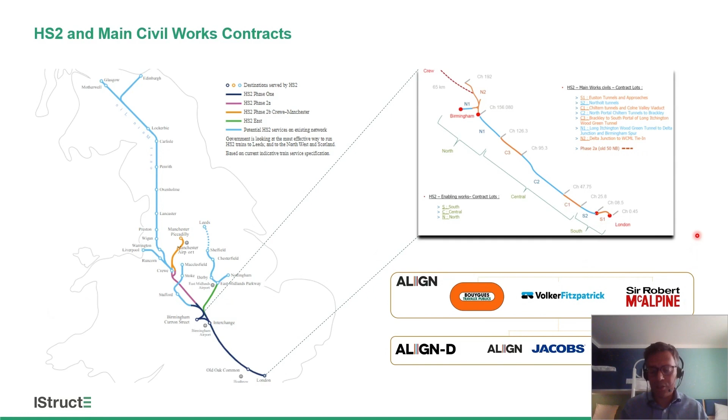A few words about contract C1. It's a total length of 22 kilometers. We've got a 16 kilometer twin bore tunnel with 5 shafts and 43 cross passages - I'm pointing on the shafts with my mouse at the moment, 1, 2, 3, 4, 5. We've got a north portal at the north and the south portal as an entry and exit point for the train. We've got the Western Valley slopes, which is a big embankment and a cutting.

And finally, the 3.4 kilometers of the Colne Valley Viaduct that we're going to cover today.

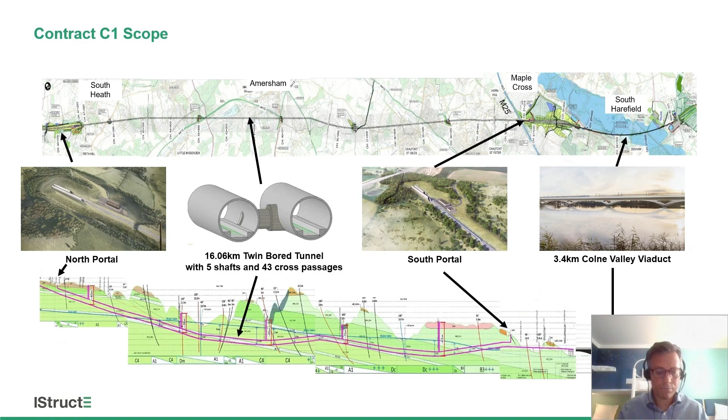A few words about the site overview in terms of the viaduct. The alignment, the black line that you see in the plan view, is the alignment of the viaduct. What I wanted to show in this slide is all the physical constraints.

The viaduct will go over 4 lakes. We've got 4 rivers, the River Colne here and the Newyears Green Bourne in that location. We've got the Grand Union Canal. We've got 3 roads, the A412 North Orbital Road in that location, Moorhall Road here, and Dews Lane. We're going over various utilities that we had to divert. We've got the Denham Aerodrome in that location, and obviously a flight path there.

We've got areas of special scientific interest, the SSSI areas as we call them, with ancient woodland, which we're not allowed to touch, as well as items that you cannot see in the plan view, such as dissolution features.

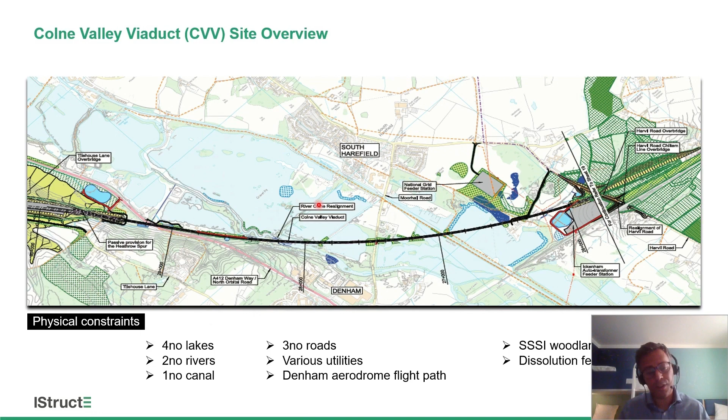A few words about the project requirements. Obviously, we had to design a structure which was buildable, safe, easily maintained and durable. We had to take into account the minimum impact on the Colne Valley Viaduct area. Cost was another factor, aesthetics was another one, as well as consents and our key stakeholders.

Finally, we had 2 particular project specific requirements. One was we had to design a beacon structure for HS2, and the second was that we had to design a structure of international significance. Obviously, this was purely an architectural report, so we had to make sure that we considered these designs and engineered them properly.

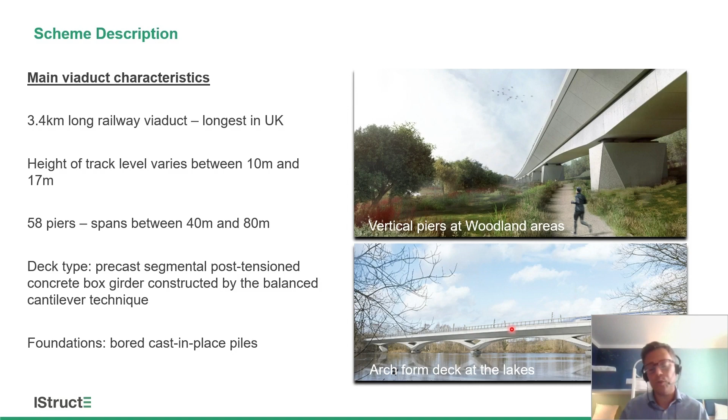A few words about the deck articulation. The Colne Valley Viaduct has been split into 4 modules. Each module is approximately 900 to 950 meters long. Modules 4, 3, and 2 are about that length, with the exception of module 1, which is 465 meters.

The decision for the 900 meter figure was based on the deck expansion and contraction due to thermal effects and time-dependent effects like creep and shrinkage, as well as the maximum stroke of a conventional track work expansion device, a rail expansion device. What we were trying to achieve with splitting up the deck was to limit the rail structure interaction movements as much as possible, and reduce the number of rail expansion joints and gaps, with the intention of enhancing safety and continuity on the rail.

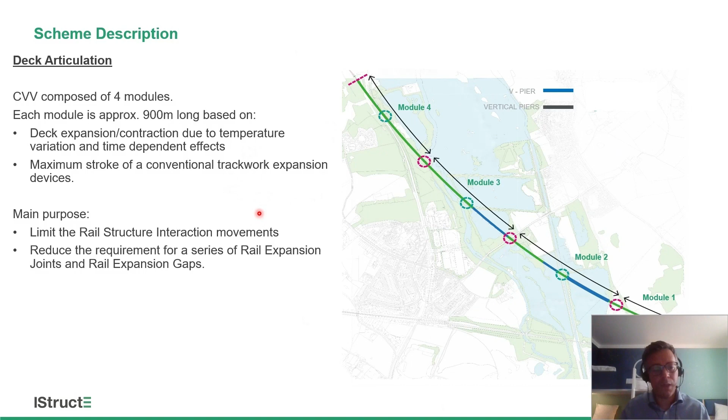Each module has a fixed point at the center, called the fixed buttress. Module 4 has a fixed point there, and the same applies for module 3 and module 2. There's an exception on module 1, where we have a fixed pier located not at the center of the module but very close to the abutment. You can see in this simple schematic how the fixed buttress works compared to the other piers.

What connects two consecutive modules together is an expansion buttress. This is a segregated structure, a portal frame structure, and I'm going to cover this in a bit more detail in the next few slides.

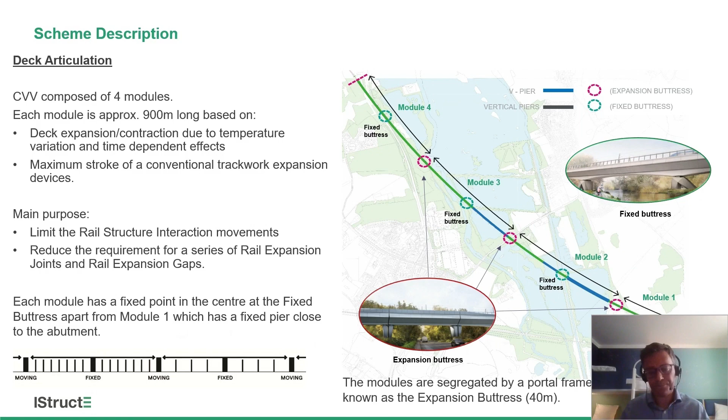We talked about module 1. The main difference of module 1 compared to the others is obviously the fact that it's half the length of modules 4, 3, and 2. It's approximately 465 meters. We wanted to move the fixed pier close to the abutment in order to minimize the expansion length between the fixed pier and the south abutment. This allowed us to remove the rail expansion joint, but when you have a continuous rail and a discontinuity of the structure, you have to confirm there are no excessive stresses in terms of rail structure interaction, so we undertook a rail structure interaction analysis to confirm the stresses at the deck and at the track slab system.

Going into the Colne Valley Viaduct design, I'm going to start bottom up, starting with the piles. For the foundations, we have 292 cast-in-place reinforced concrete piles. In some pile caps we have 4 piles, in others 6 piles. They vary in diameter, sometimes 1.8, ranging from 1.5 to 1.8 meters, supporting conventional reinforced concrete pile caps. They go up to 53 meters in length, and they're typically founded in chalk.

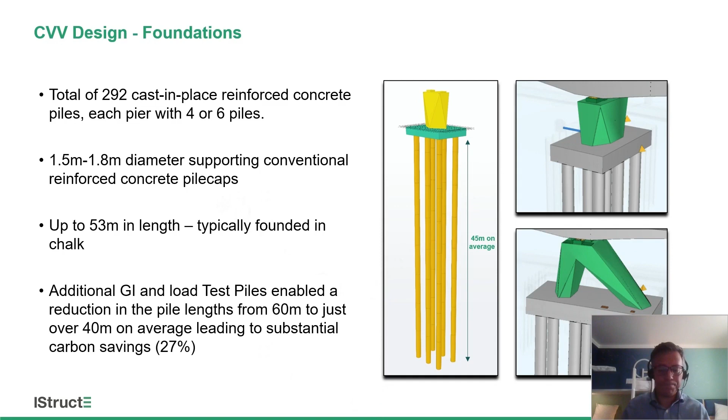A summary of the foundation design as per BS EN 1997 part 1: these are friction piles, and the shaft resistance is based on the effective overburden stress in accordance with CIRIA 574. We ignored end bearing capacity due to uncertainty with dissolution features and voids, and we considered a minimum factor of safety of 1.5, expecting settlements of less than 1% of the pile diameter.

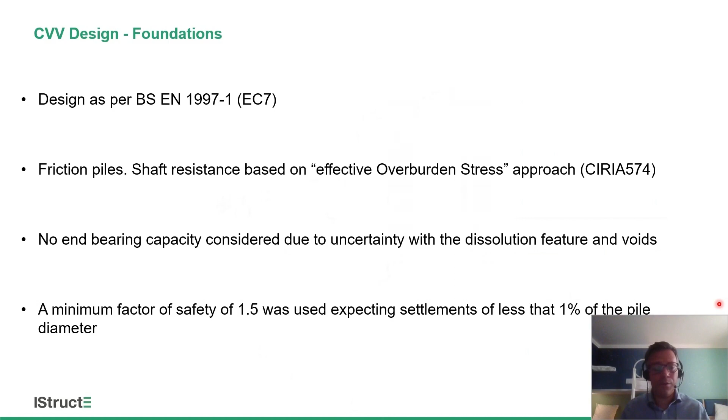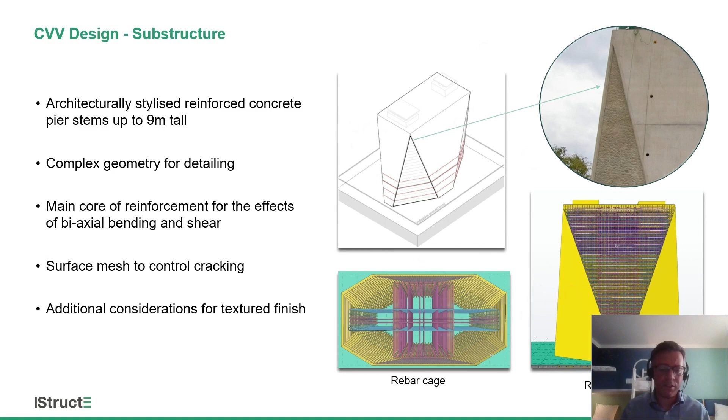One of the fixed buttress piers contains a steel shear key at the top, while the other contains a shock transmission unit. I'll explain why we installed a steel shear key and an STU. We started initially with a monolithic arrangement for the fixed buttress, as shown in this location. This design solution was quite sensitive to soil stiffness, giving excessive foundations and very high stresses due to creep, shrinkage, and thermal effects on the deck.

We had to change to an articulated configuration with the use of spherical bearings and steel shear keys. That way, we managed to reduce the dependency on soil stiffness and optimize the foundations, but we were still getting high stresses at the deck due to creep and thermal effects.

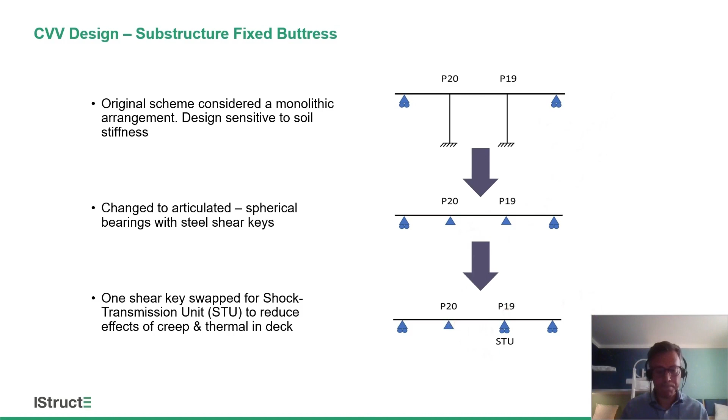I'm going to talk a little bit about the STUs. This is a simplified sketch that shows the 4 modules. The line in green is the fixed buttress pier, and this is the STU that is contained on top of the pier. So the STU is able to transmit short-term impact forces such as braking or traction from the train.

While at the same time it's able to permit long-term movements between the structures such as temperature, creep, and shrinkage. So the principle is similar to the one that we have on our cars, the seat belt, where we're able to move slowly, but during a sudden braking of the car, it locks.

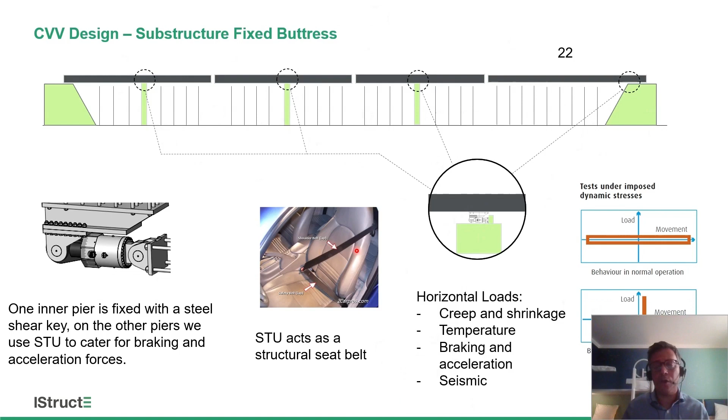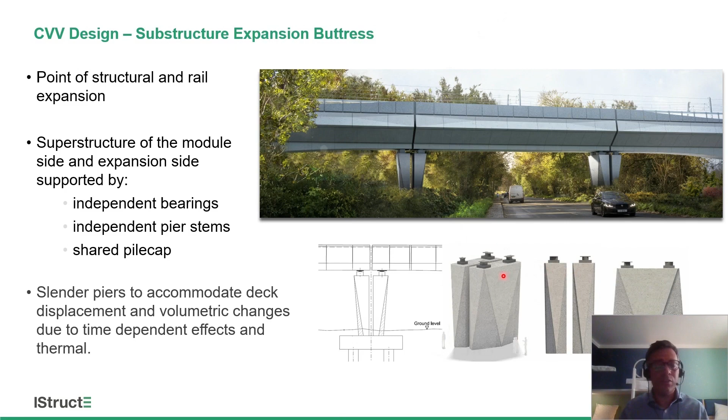Both of these elements, either the end of the module or the expansion side, have independent bearings. As you can see in the isometric here, they have independent pier stems, but they are sharing the same pile cap. Again, these are fairly slender piers because we were trying to accommodate all the deck displacements and the volumetric changes due to the time-dependent effects and thermal movement.

Moving on to the superstructure. This is a single-cell precast segmental concrete box girder. It is able to carry a dual track with trains running at 320 kilometers an hour. It varies in depth, going from 6.7 meters at the piers all the way up to 3 meters at midspan. We have a constant width of 14.7 meters at the top flange and 6.5 meters at the bottom slab.

We've got vertical webs and inclined panels. Something that is worth mentioning is that the inclined panels are not match cast, so they're not really contributing into the longitudinal inertia of the deck.

However, they do contribute in the transverse direction during a particular load case, and that is derailment. So during derailment, when the train derails, it will hit the robust curb. Hence, the whole system—robust curb, top slab, inclined panel—will act as one, and this is when the inclined panel will contribute.

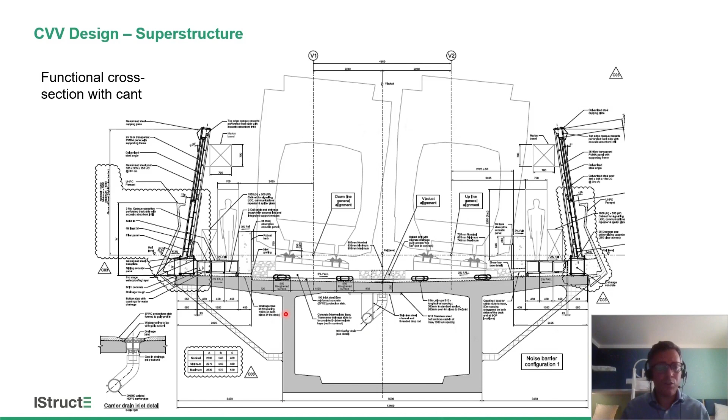I will show you a few joints from the functional cross-section. The main reason why I wanted to share that is to show you what's happening on top of the deck. This is the functional cross-section with cant, and this is the functional cross-section with cant, but at the OCS mast location.

I think it's worth talking about two elements. Well, I will talk about all the elements, but there are a couple of innovative elements here. One is the parapets, which is the element you can see here, I'm pointing with my mouse. This is a UHPFRC parapet, which stands for Ultra High Performance Fiber Reinforced Concrete Parapet. With this type of material, we're able to achieve thicknesses of 50 millimeters in that location, and it's unreinforced. We've got fibers obviously inside, and it's got this strange shape for aesthetic reasons.

We've got the noise barriers in that location, OCS masts, the cable troughs and drainage troughs in that location, robust curb, and another sort of innovative element is the protection slab, which is an SFRC protection slab. It's a steel fiber reinforced concrete slab that is able to work without reinforcement, and any forces picked up by the track slab are transmitted through those shear links onto the protection slab, and then via a shear key that we have very close to the robust curb, we're able to transfer the interface shear onto the deck.

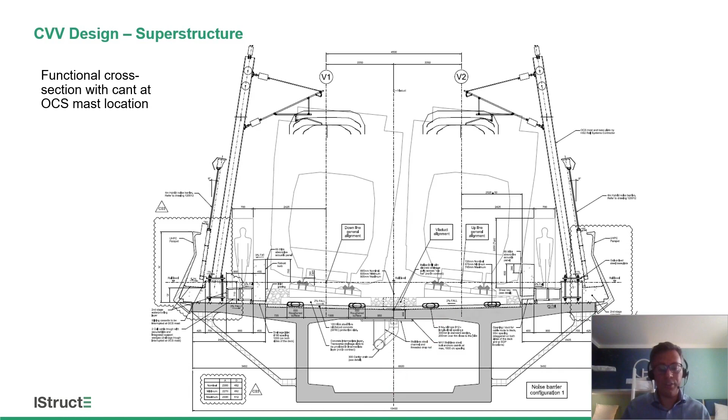Moving on to the arch form deck. These are located over the lakes, as we've discussed before. Spans vary between 67 and 80 meters. They were inspired by the stone skipping effect from the HS2 design report that we mentioned before. The whole idea was to increase the sense of openness over the water and the views.

Those elements are composed of two reinforced concrete legs forming a V shape, connecting to a node in the center at that location, and they're supported by bearings on top of the piers. The bearings are located above the 1 in 100 years flood event plus climate change.

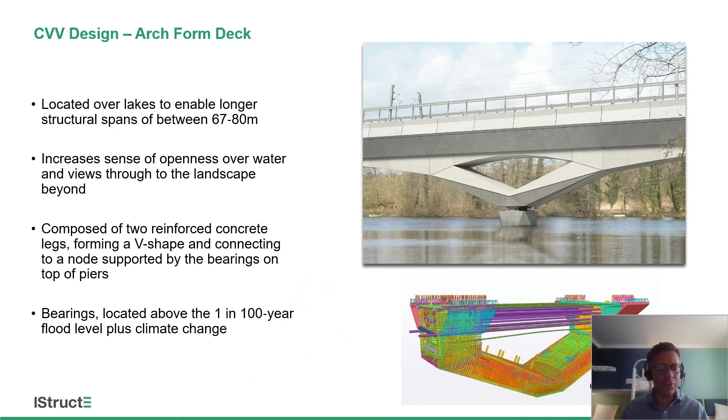One of the things worth mentioning is that although it looks like an arch, there isn't any arching effect in that bridge. We were trying to avoid that. Obviously, we don't have massive foundations to take this lateral thrust from the arch, so we designed those elements to act as deep beams.

The deep beam behavior means the lower chord of those elements acts in compression, and for that reason it doesn't generate any lateral thrust in the foundations. Obviously, those piers move because of volumetric changes due to creep and shrinkage, and when they move, they will predominantly create a particular eccentricity at the location of the bearings at the central node.

What we did in order to avoid that, we inverted the bearings. We actually turned the bearings upside down, so that the sliding element is located at the top of the pier rather than under the deck. With that configuration, the vertical reaction will always be located at the point of intersection of the lower chords of the arch form deck, and this improves substantially the structural behavior of the deck. Obviously, that way we are transmitting the eccentricity onto the pier stems, but we have designed this out.

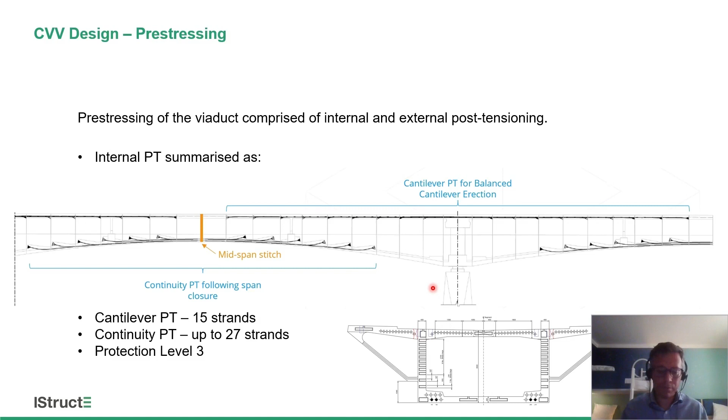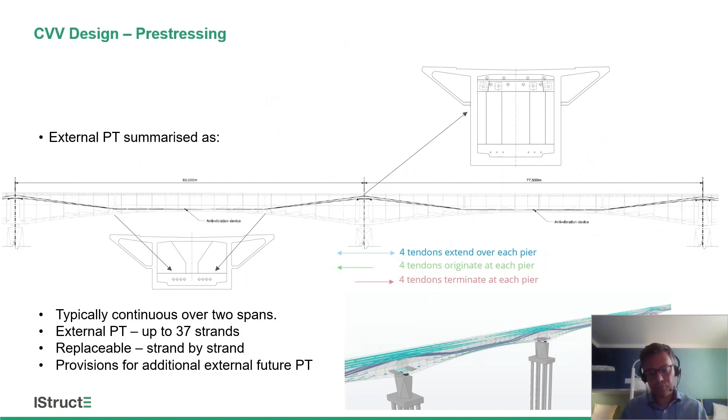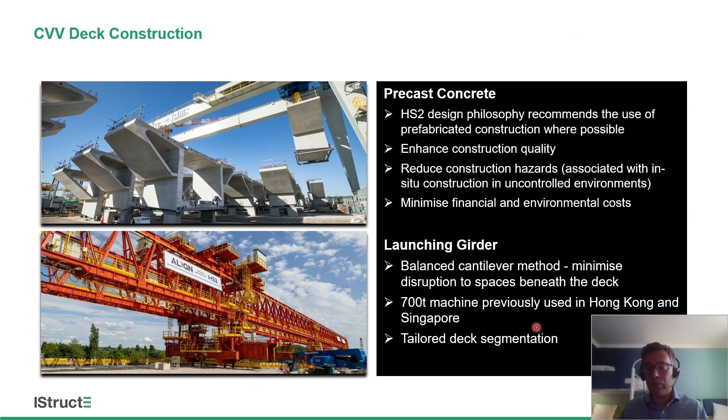The viaduct is constructed with the use of a launching gantry. We used this 700 ton machine. It was kind of recycled - it was used before in Hong Kong and Singapore. We had to dismantle it, ship it out to the UK and erect it again. All the segmentation and the deck segments are tailored to the launching girder.

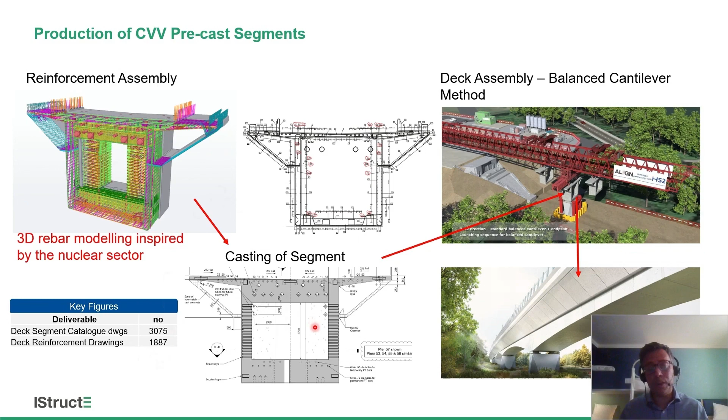We did use a lot of 3D rebar modeling in the design. This was inspired by the nuclear sector. We produced more than 3,000 segment catalog drawings and more than 1,800 deck reinforcement drawings. All the 2D drawings were coming out of the 3D rebar modeling, and they were used on site.

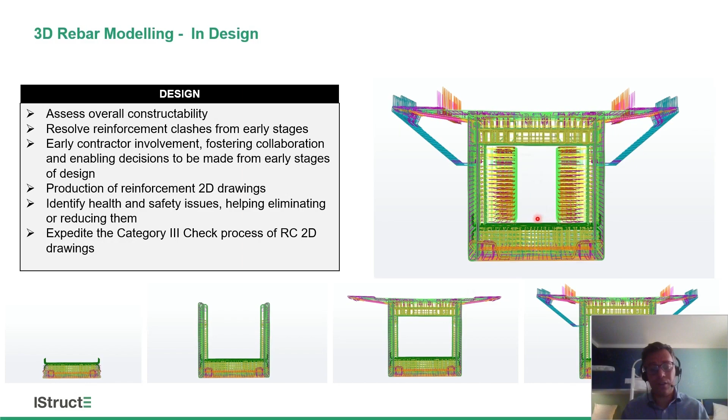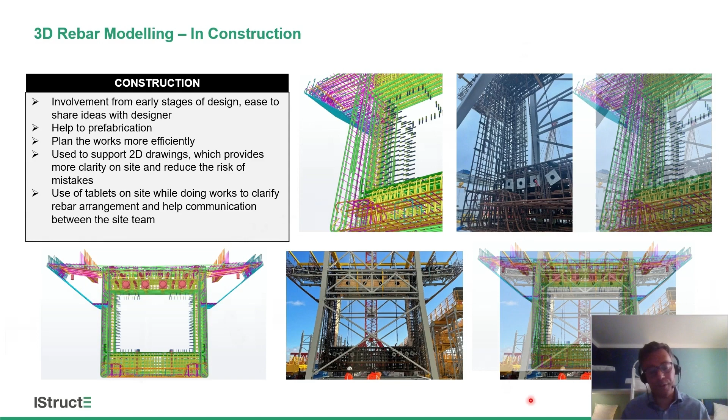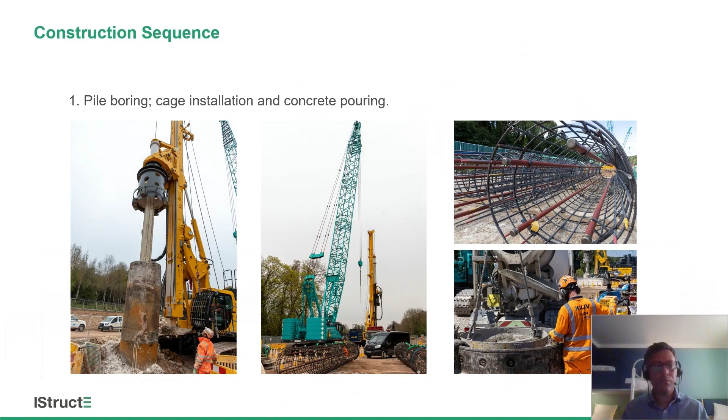Substructure piers - this is the fixed buttress pier. You can see the complexity in terms of the reinforcement in this rebar cage. We've got the shutters, the formwork in the middle, and also the final concrete finish on the right hand side.

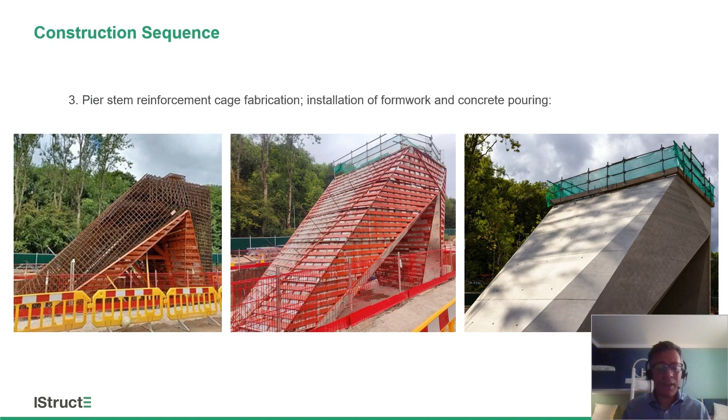I have a few slides to go through a typical cantilever span erection. I'll go through these quickly - I'm conscious of time.

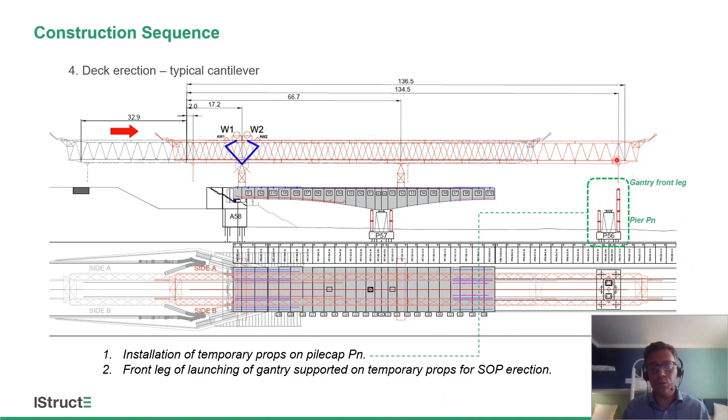We're going to start with the installation of the temporary props on a particular pile cap, as shown here. After that, the front leg of the gantry is moved and it sits on top of those temporary props.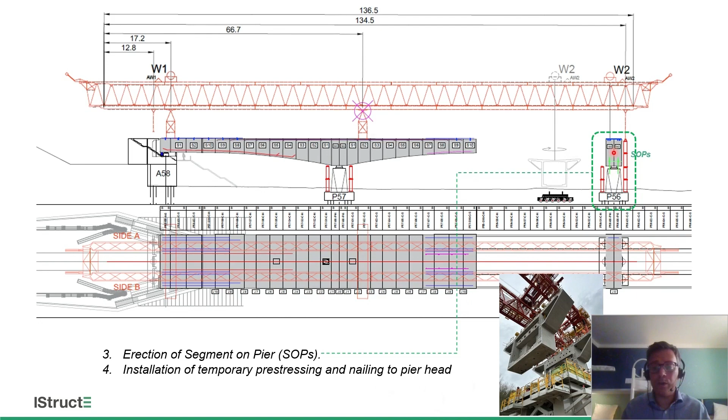Next stage is to erect the segment over piers, or SOPs as we call them. We install the PT nailing system and we connect the SOPs to the piers, fixing them in place.

Next stage is to move the gantry support on top of the SOPs. At that configuration, the gantry is now able to start the balance cantilevering.

We start with the first segments, the so-called S1 segments, as you can see here in the photo in that location, and we install the temporary nailing for cantilever stability during erection, as shown in that location here.

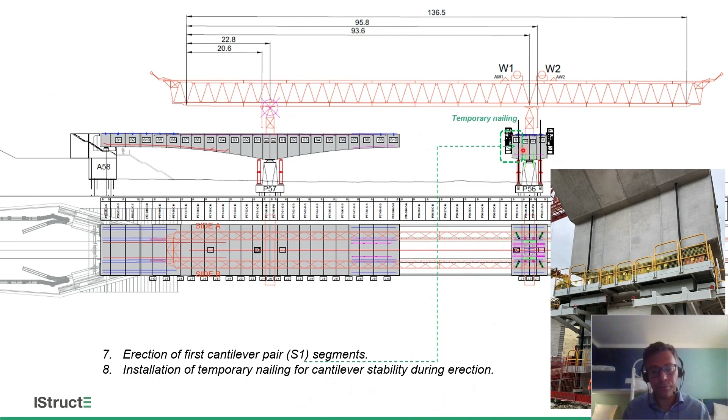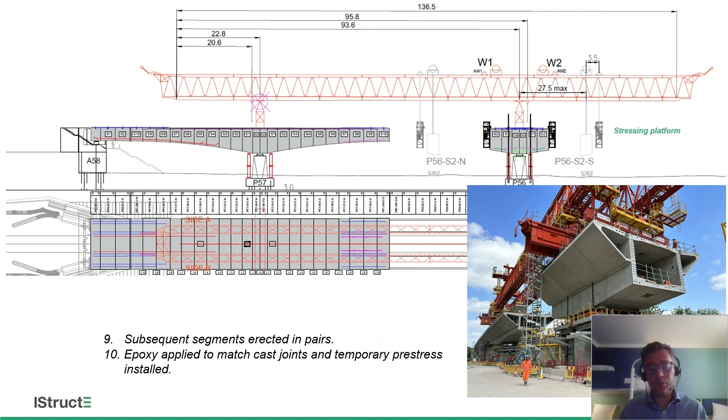After that, all the segment pairs start getting erected. We apply epoxy to the match cast joints, and temporary prestressing is installed to support the segments.

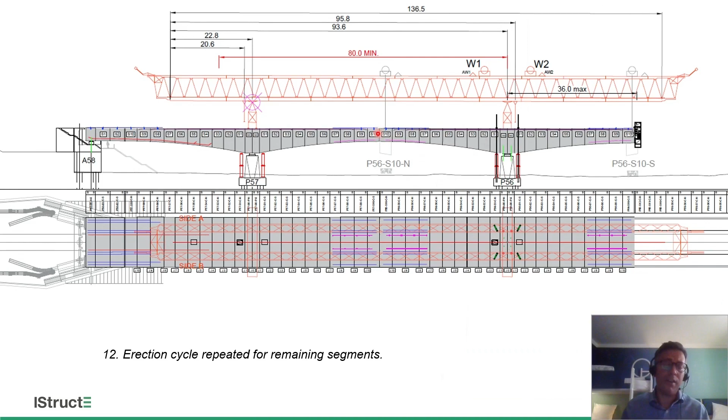We pour the stitch, and the next step is to install and stress the permanent internal continuity tendons at the bottom slab.

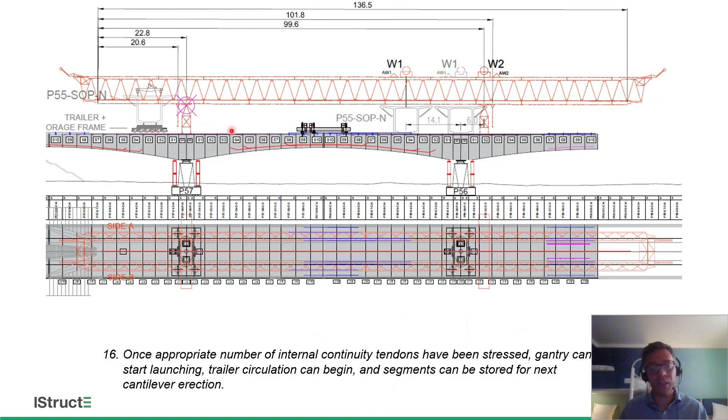Once all the internal continuity tendons are stressed, the gantry is able to start launching again, and from that point onwards we use the trailer, the machine that transports the segments up to a certain point where the gantry lifts it and puts it in place. After that, the whole process continues again.

The gantry is moved on the next pile cap, and it's exactly the same cycle.

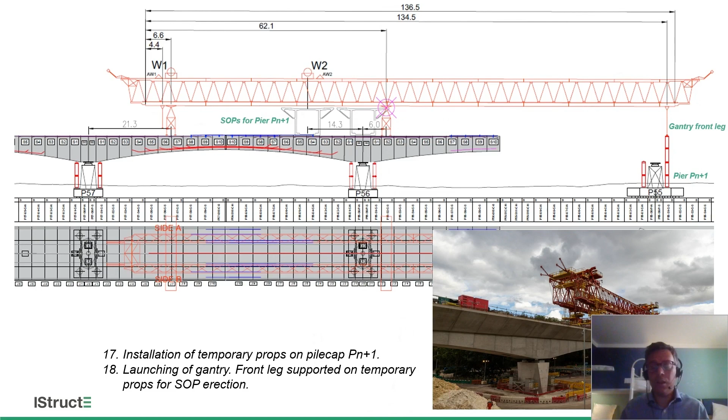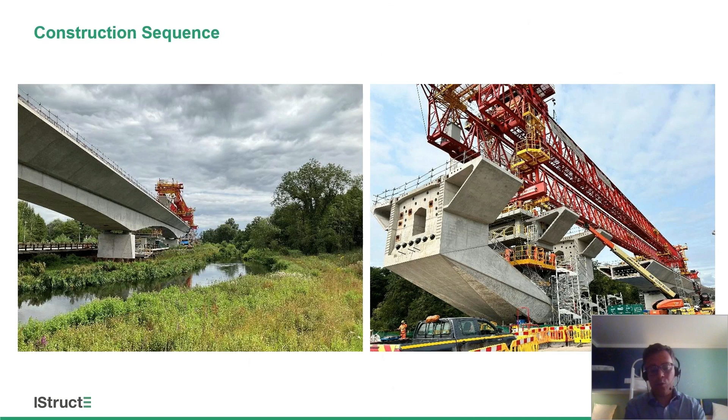Last slide is a few current photos. This shows the viaduct at the woodlands area where we have vertical piers, haunch deck, 60-meter spans, and this shows the gantry sitting at the moment over one of the arch frame decks. Thank you very much.

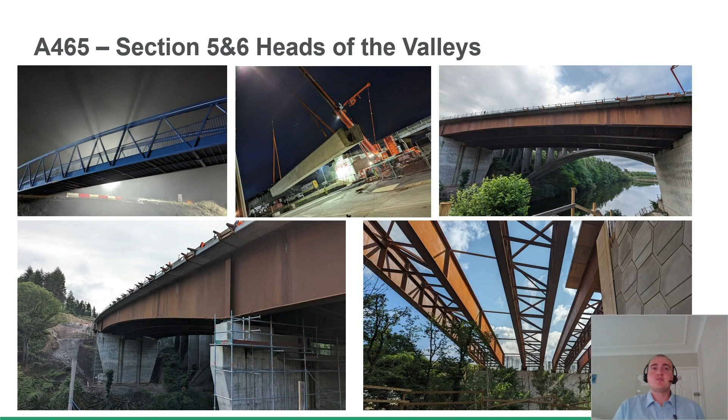Whilst it's only 18 kilometres long, this section of dualling has 36 bridges and 4 refurbished bridges, with a whole variety of different structures going on. We've got a multi-span weathering steel viaduct, a 70-metre integral bridge, some normal pre-stressed beams, some typical footbridges, and then of course a post-tensioned balanced cantilever viaduct.

So who's involved in the scheme and why should you listen to me about it? My name's Henry. As you might have noticed, I don't have a Welsh accent - hate to disappoint you if any of you came for that. I originally grew up in Brighton and then moved to Swansea to study civil engineering. As part of my course, I had a year in industry placement, which was with Atkins in Cardiff.

At the time, they were working on the A465 tender, so I got involved with a load of work on that, carrying out different value engineering tasks. I then went back to Swansea and got my master's, then returned to Atkins, where I dived straight into the design as it was kicking off, and was part of a small team of very talented engineers working on Taf Fechan Viaduct. After 2 years, the design was finished, handed over to the contractor, and I went up to Merthyr Tydfil, where the site office is, to help them on site with the construction.

So you'll be probably wondering all these different logos and who they are. The Welsh Government is the primary client, and FVC, or Future Valleys Construction, is the principal contractor, of which FCC is part of that consortium. Atkins Realis was formerly known as Atkins - we rebranded on Tuesday, so if you're wondering who they are, that's who we are. Tecozam and BBR are the subcontractors on site responsible for building Taf Fechan Viaduct, and Sener was the Cat III checker. So a wide range of companies - I've probably missed a couple, I'm sorry if that involves you.

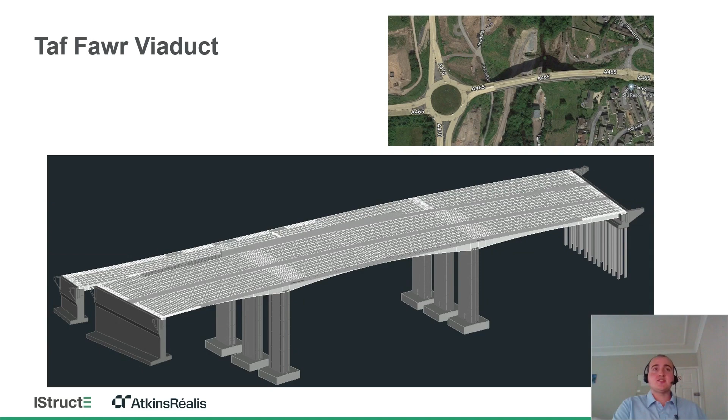Now, a key difference between Taf Fechan Viaduct and the HS2 viaduct we just looked at is that this is a post-tension balanced cantilever cast in situ, so there's no precast segments on this. A key aspect of this design is that we'll build the piers and then get to segment 0, or the hammerhead as we're calling it, and we'll then cast a segment on the east side, cast a segment on the west side, tension the top tendons, and then repeat the same process again.

So our segments in total are 6.4 meters. The closing segments are slightly shorter, and we have 5 segments cast from each pier, excluding segment 0.

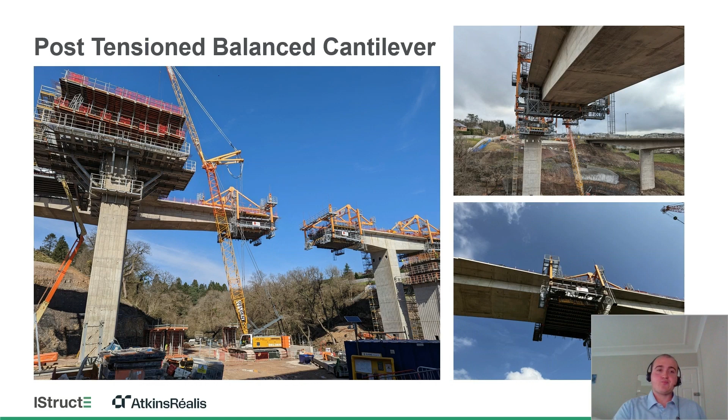So how we've gone about modeling this is we've got a very complicated load model. In this model, we don't just have the 3D geometry, we also have the time aspect, so we have 107 construction stages in this model. It starts off as a line beam, and as you go through the construction stages, it eventually becomes a full-on grillage. And to add even more complexity to this model, we've even modeled the tendons within it.

Now, this had some very key advantages. It allowed us to check the SLS conditions very quickly, so that we could quickly run through, adjust tendon profiles, see what the overall SLS stresses were, and then rework them if they weren't working. It also allows us, because we've got time, to calculate the tendon losses directly in the model to help with the ULS design. And of course, it's also helping with pre-camber. I can just run a button, it spits out all the pre-cambers. I can hand that over to David, and he can go and instruct the team on site to build them as such.

So I'm going to dive into a little bit of the various elements of the structures and hopefully give you an insight into what governed their design. As you can see, our piers are actually quite tall and quite chunky. It's now 35 meters, which might not sound like very much, but when you're walking up those stairs, it sure is tiring.

What governs the design of this is the cantilever balance condition. Because we don't have a bearing at the top, the entire moment is held by the piers. Once we've cast one side and not the other, combined with the loading of the travellers and any wind loading, the moment at the bottom of the piers is very large. As a result, we've had to increase the size of the box, so our box stands at 3 meters in width and 7 meters wide.

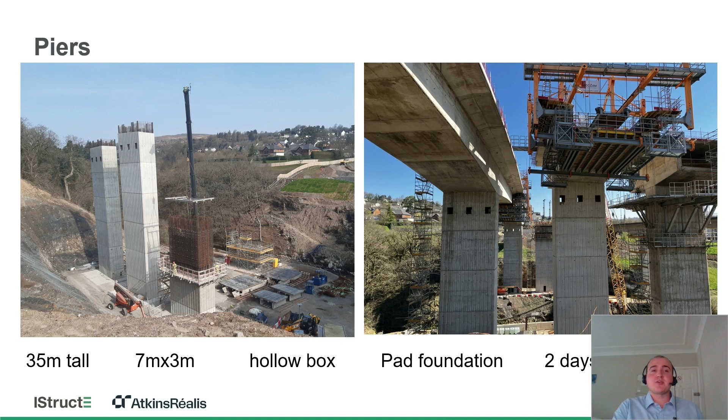Focusing on the abutment design, we have 3 abutments because of the on-slip. The 2 on the west side are pad foundations on rocks with a retaining wall, approximately 10 meters in height - they do differ a little. On the east side, we have a piled abutment, founded on rock. Piles are, I think, 25 meters in length and 1.2 meters in diameter off the top of my head. As you can see in the top corner, we've got a 400 meter cube base being poured, which is for the west main line abutment.

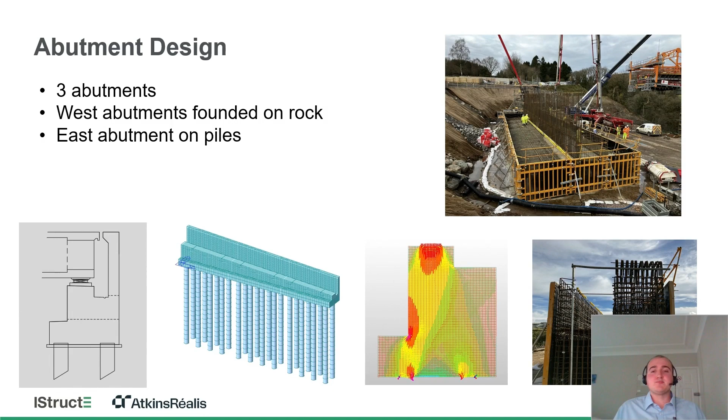Moving on to the deck segments, effectively what we have is 3 separate bridges that end up being stitched together. So we have 72 segments, again 6.4 meters long, where we've got tensioning in the top slab, top of the webs, and the bottom slab. This box ends up being 4.5 meters deep at the piers, and it goes to 2.5 meters towards the center span. The webs are also changing in size.

Over the pier, the webs stay at 700 mil, and that's to allow tendons to anchor in there. Meanwhile, in the center of the span, we drop to 500 mil because we just don't need that sort of thickness.

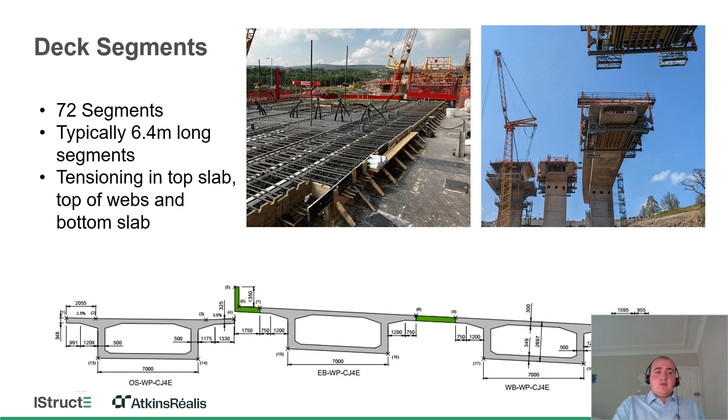Moving on to the post tensioning, which is really where the bridge gets its strength from - we have tendons in the top slab and bottom slab. The top tendons are tensioned as we go along, so we'll cast the balanced segments, tension them up, move out, and then repeat the same again. Meanwhile, the bottom tendons we can't do that because evidently we're not connected up. So these top tendons help in the hogging case, and the bottom tendons in the sagging case.

The way we've done this is we have 19 strands of high strength steel, which get pulled by a hydraulic ram at the different anchor points. Because we have 3 decks, all with different curvatures and different widths, it ends up as 3 pretty much unique tensioning designs, where we've tried to standardize where we can.

So the post-tensioning in the top slab has to work a little differently. Because of the tendons and the high force concentrations from where these are being stressed, we need a lot of bursting reinforcement around the anchors.

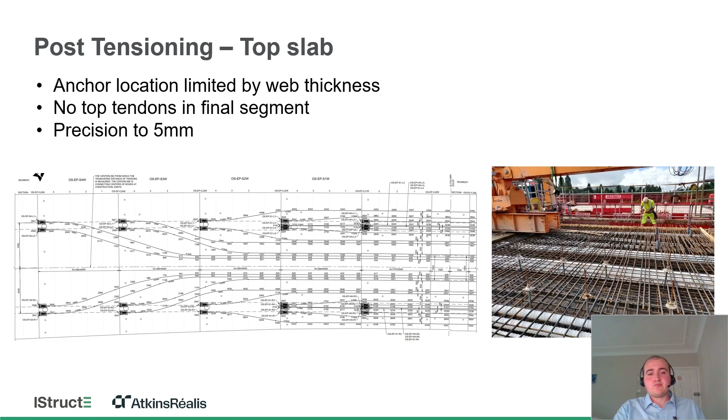So focusing a little more on the post-tensioning anchors now. You've got a high stress concentration in this location, and so we've got to have a way to deal with this. We have the white duct, which you can sort of see in that picture there, go into the metal trumpet. Around the metal trumpet, we've got the helical bars and then some bursting links around that. And in the case of the top tendons, where they're finishing in pairs, we've got another set of bursting links around the pair.

Now, unlike the High Speed 2 viaduct we just looked at, we don't have any external tendons. They're fully internal, and that has come with a load of requirements. So again, we've got the polymer ducts like HS2 did with its internal tendons. And then we also make sure that they're air tested so that there's no possibility of air or water getting in. They're then grouted up, cast in concrete, and the concrete itself is a special mix too.

So we're trying to have a balance. We want early age strength so that we can move the travelers out and not delay the program. But at the same time, we need to make sure that these tendons have longevity for its 120-year design life. So it's a special low chloride mix to make sure that we reduce any chance of corrosion happening to the tendons.

In the case of the top tendons, these get cast in concrete with the next segment, so water should never be able to see the ends. Meanwhile, the bottom tendons are intended to just be left as is. So whilst they come to an end, we put a cap on them. That cap then gets spray applied waterproofing. We then also have a load of drainage holes in the bottom deck to ensure that if water ever does get in, it's not ponding. Hopefully that should ensure that these tendons, once installed, don't ever need to be dealt with again.

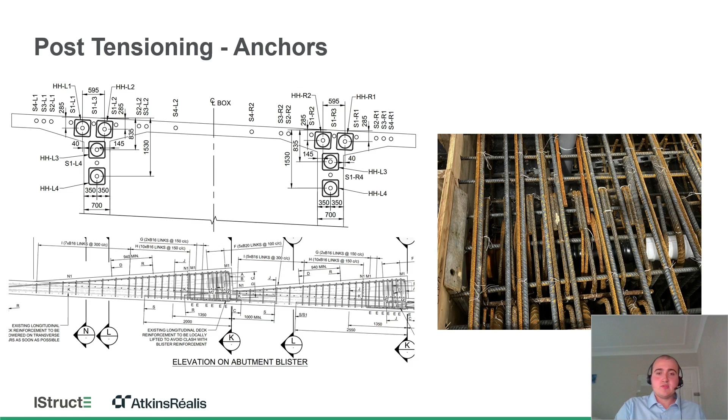Now, on paper, it all sounds well and good, but ultimately there are some changes that end up happening. We can plan as much as we want, but eventually something will come as a surprise. We've had some small changes and we've had some pretty significant ones.

One of the major ones I feel we should at least mention is the difficult ground conditions on the east side. Initially, it was designed such that we'd close off the east side, then cast the middle closing segment, then close off the west side. But because of the difficult ground conditions, the east pier fell behind, and as a result, the west side raced ahead. This meant we were asked, can we change the sequence around?

Now, whilst it sounds initially not too trivial to change it from east, middle, west to west, middle, east, the design, I don't know if you picked up in the drawings, isn't actually symmetrical. As a result, the loadings that would be locked in end up changing. Thankfully, due to the model and the construction change in that, reworking this wasn't too difficult. And as a result, we were able to quickly work through, issue out some small changes to reinforcement, and that saved the contractor approximately 3 months in time.

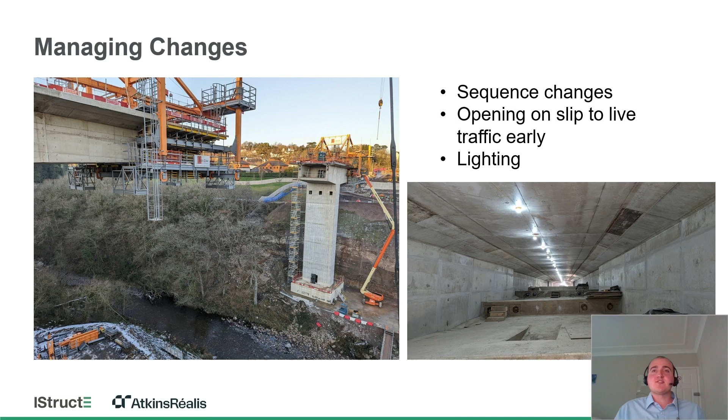Happy that you were able to listen to the whistle-stop tour of the design there before I hand over to David. We were thankfully able to look at what governs the piers, the three box arrangement, and how the complex geometry effectively makes this three different bridges. And then also how the post-tensioning works and how we've been able to use that to lead to a very lean and efficient design.

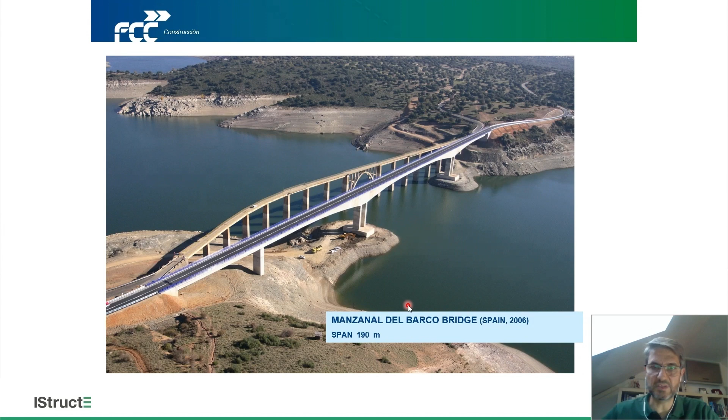This is a couple of examples. This is a bridge in Spain with 190 meters. This is another bridge in Zamora over the River Duero with a main span of 92. And the major bridge is this bridge with a main span of 180 meters in Mexico, San Marcos Viaduct.

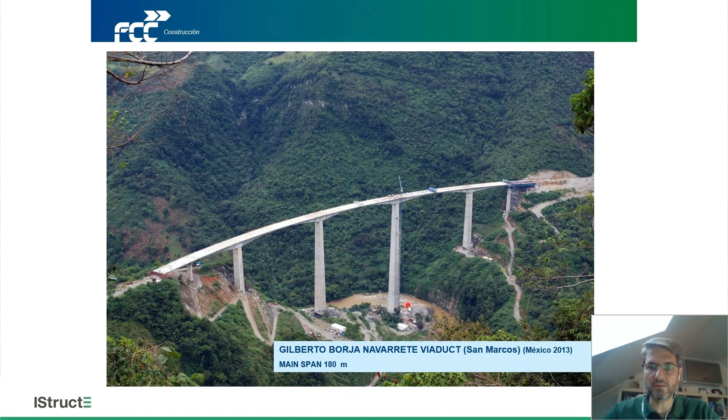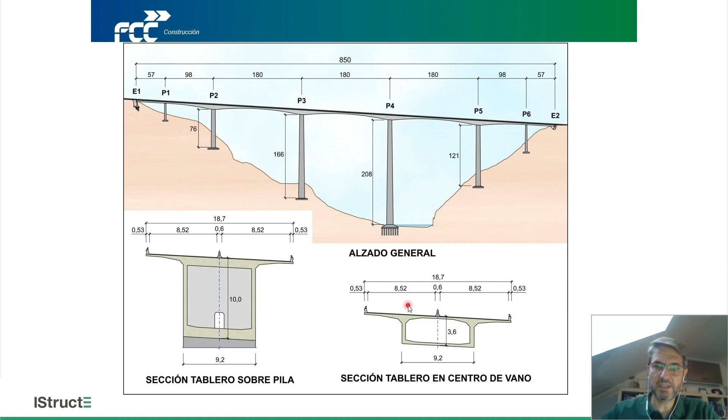The most challenging part of this bridge was the height of the piers, with the main pier more than 200 meters high. So our intention has been to try to use some of this know-how that we have learned in this previous project in this bridge.

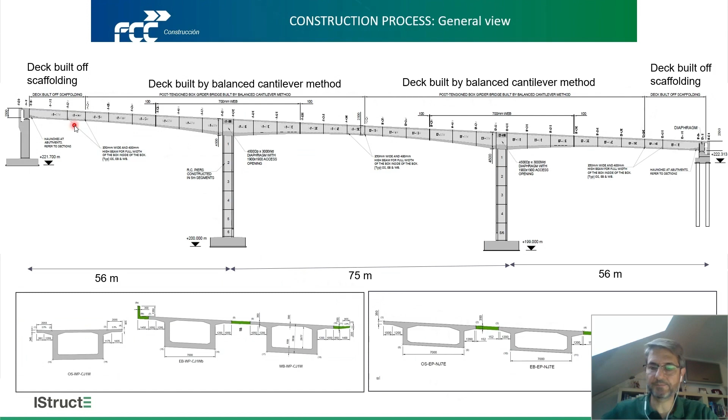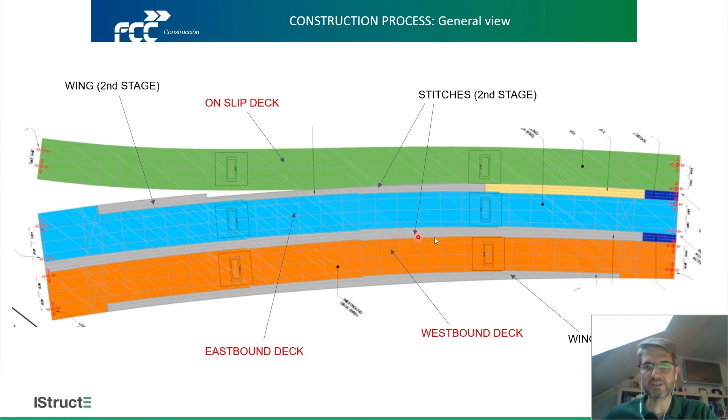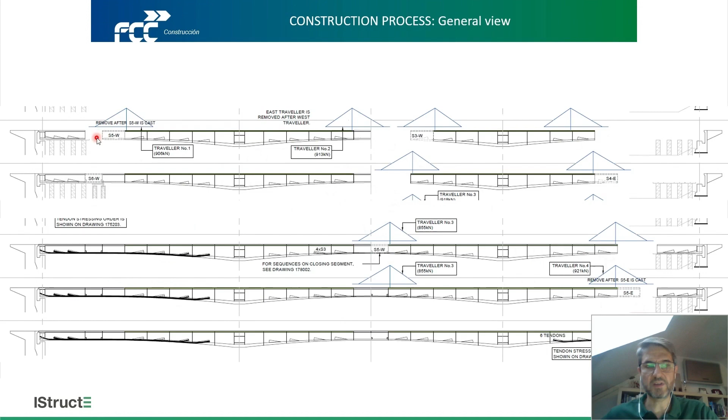The general process in every deck is progressing with only 4 form travelers, 2 at every pier. The west pier is ahead of the east pier, so the progress is ahead at this pier. When we finalize the balance cantilever part at this pier, we have to close the deck against the scaffolding part. After this, we close the segment in the mid span, and the last step is closing the lateral span, the east side. So the sequence is first the lateral span in the west, mid span, and the east span.

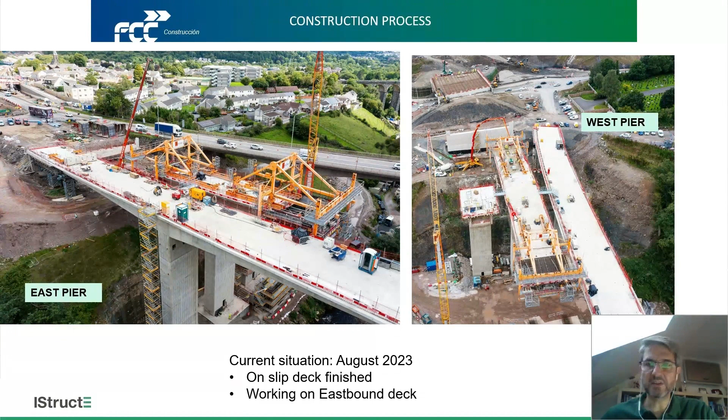Some words about the balanced cantilever construction. Good correlation and coordination between the contractor and designer is very important, because every unbalanced situation on site needs to be communicated to the designer to double check. The designer has to evaluate any unbalanced situation due to wind, but the contractor has to provide any additional equipment needed to place over the deck.

But the advice is not to place this kind of equipment at the tip. The usual approach is to place any heavy equipment over the pier, not at the tip of the cantilever. For example, it's impossible to cast both segments at the same time - it's necessary to cast one segment, then balance the situation, so the temporary unbalanced situation is something the pier can resist.

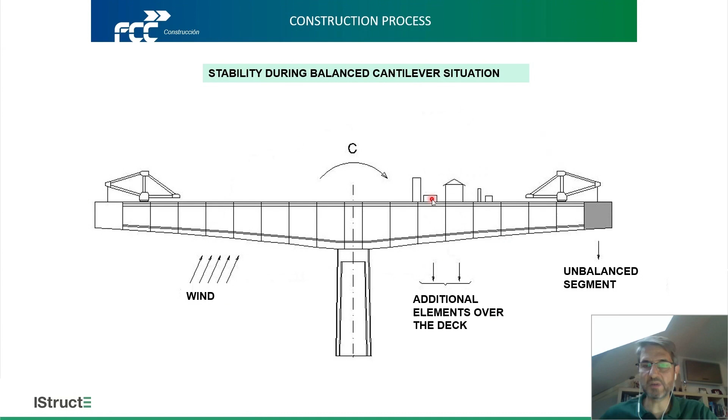Before launching any traveler, a geometry control is necessary to double check if we are progressing with the right geometry. After this check, we can launch both travelers and make the setting out of the travelers. If any correction is necessary, we can implement it in the next setting out of the next segment.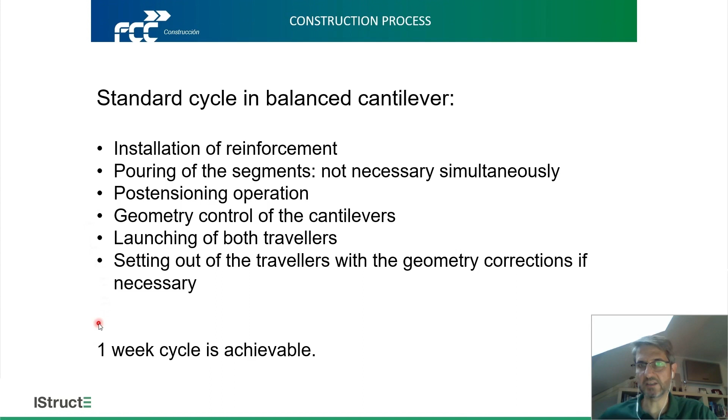The usual cycle we are achieving is between 2 weeks and 1 week. 2 weeks in the first segments because the size is bigger, but in the last segments, where the total height of the deck is less, we are achieving 1 week.

The geometry control is a key question in this kind of bridge because it's impossible to achieve the theoretical elevation without a set of precambers.

This set of precambers is formed by 3 concepts. One is the precamber that has to be defined by the designer, because they have to analyze the construction process, taking into account all the ages of all the segments. They also have to model all the steps in the construction sequence and all the creep and shrinkage rates.

The other concept is the precamber of the traveler itself, which has to be evaluated by the traveler's designer. And finally, any potential correction has to be implemented in the precamber if we realize we are progressing with the wrong geometry.

A couple of tips about geometry control in balanced cantilever construction. It's very important to make the geometry control very early in the morning, to avoid any movement due to the thermal gradient caused by sun radiation.

This maybe isn't very important in the UK, since it's usually raining or very cloudy every day, but in other areas it's a very important question. The bridge can move several centimeters day by day due to sun radiation. Another question is to avoid any unbalanced situation of loads during the geometry control, because any small load at the tip of the cantilever can change the entire geometry of the bridge.

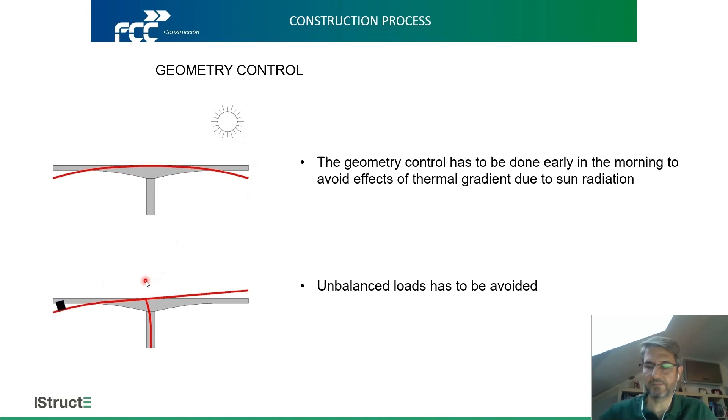The traveler has 3 different sections: the front section, the rear section, and the anchorage section. In the anchorage section, there are several vertical anchorages to avoid overturning the traveler during pouring.

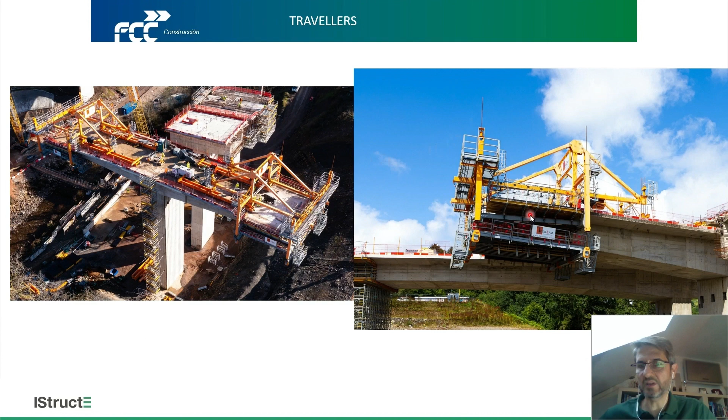The formwork is formed by 3 parts: the lateral formwork, the inner formwork, and finally the bottom formwork. All of this formwork rests on the front section from hangers connected to the front side of the traveler, and the rear part, during pouring, is connected to the previously cast segment to allow continuity of the concrete.

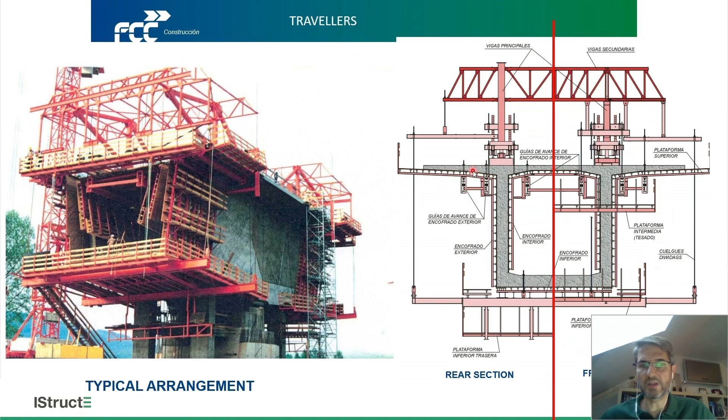Some comments about the segment length. In this bridge, the segment length is 6.4 meters and segment 0 is 14 meters. This is not a very usual figure; the usual approach is 5 meters of segment length. In this case, we are progressing with this approach and it's working rather fine.

But maybe for longer span length, a shorter segment is a better approach, because at the end, the unbalanced situation is reduced with shorter segments. The works on the tip of the cantilever are reduced, and the post-tensioning can be distributed more easily by the designer if we use shorter segments.

The length of segment 0 is a key question because segment 0 is the first part of the deck that has to be constructed without a traveler. So you have to bear in mind that it's necessary to install a lot of temporary works to cast these elements. It's important to reduce as much as possible the length of this segment, but at the same time it's necessary to think how you are going to install the travelers for the first time.

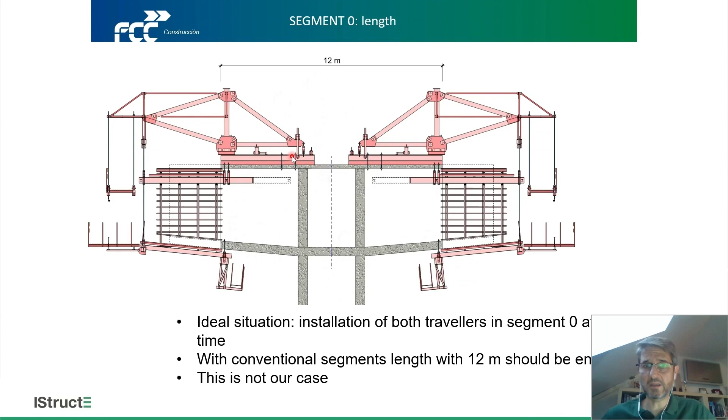According to Tecozam's preference, we have progressed with installation of only one traveler. After this installation, you can cast one segment, launch this traveler, and in this situation you release enough room to place the second traveler. With this approach the installation is easier, but you have to spend maybe more time during the installation of the travelers. But this is the approach in this bridge, and it's working rather fine.

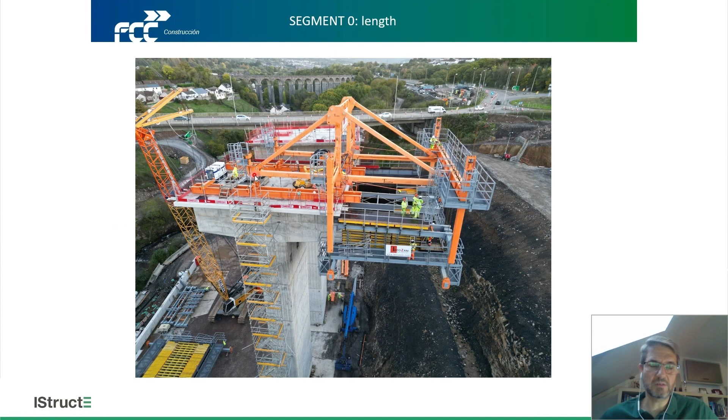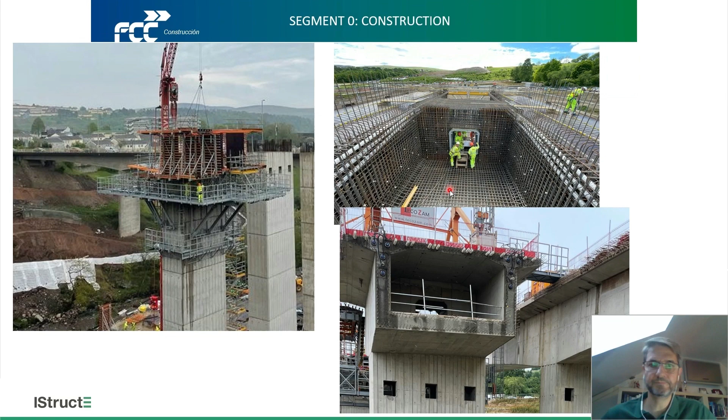The closures: we can explain two different things, the closure in the main span and the closure in the lateral span. In the main span closure, you have to avoid any relative movement between both cantilevers. These movements can appear due to wind loads, any unbalanced load, thermal movements, or whatever. So it's necessary to connect both parts of the cantilever with a temporary structure.

In the main span, as these two cantilevers have very similar stiffness, we have progressed as usual with the rails of the traveler. We connect both cantilevers with PT bars, and with this connection we avoid any horizontal and vertical relative movements. We use the formwork of the traveler for the closure of the main span, and we cast in two stages: one stage with the web plus the bottom slab, and in the second stage the top slab. After pouring and hardening the concrete, we can install the post-tensioning and continuity post-tensioning, and then release this temporary connection.

In the lateral span, the approach has been different because this part of the cantilever has very different stiffness from the part that is over the scaffolding. So additionally, for this closure we have used the formwork of the scaffolding instead of the traveler. We have used the rails of the traveler to avoid longitudinal relative movements, but the downward movements of the cantilever are avoided thanks to the scaffolding, while the upward movement is restrained thanks to the ballasting load that we have applied in this area.

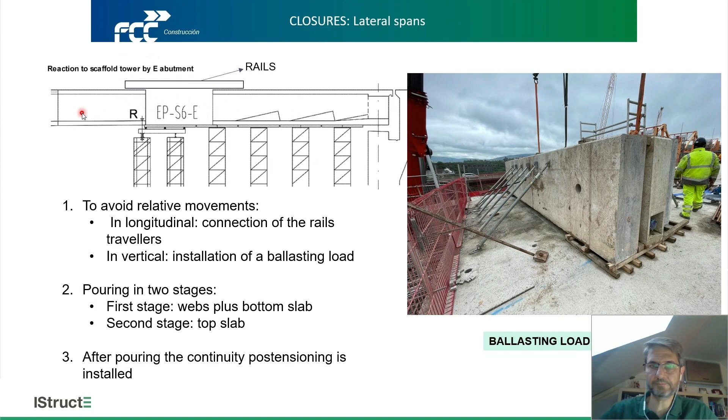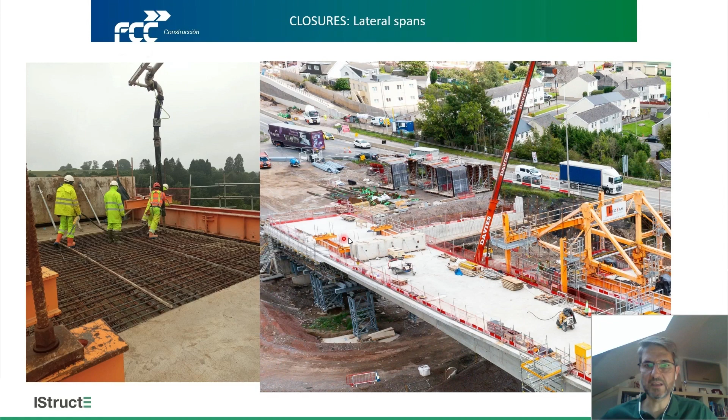This is a general view of the closures in the lateral span. Here we are casting the top slab. These are the rails connecting the tip of the cantilever and the part over the scaffolding longitudinally, and the ballasting load, avoiding any uplift movement of the tip of the cantilever. And this is the general view after finalizing the closure segment in this area.

Finally, some ideas on how we are going to address the stitches. Tecozam has designed and is fabricating a set of travelers that we are going to use in this final step. The approach is to use a traveler that straddles the loads between these two adjacent boxes, and we are going to pour something around 10 meters long.

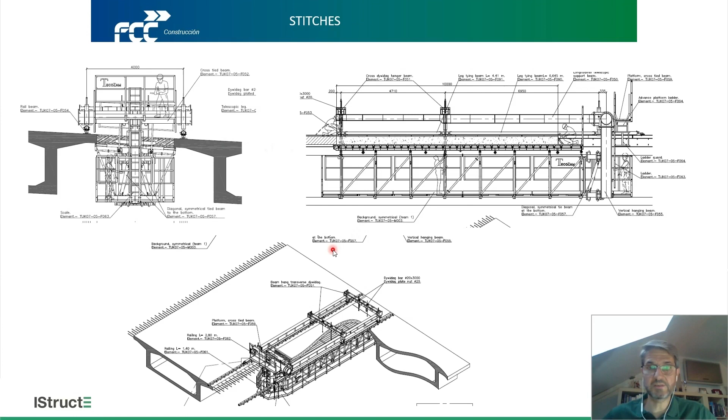The elements are right now under fabrication, and I think in a few months we can have these elements on site to finalize the bridge. And that's all. Thank you very much for the attention.